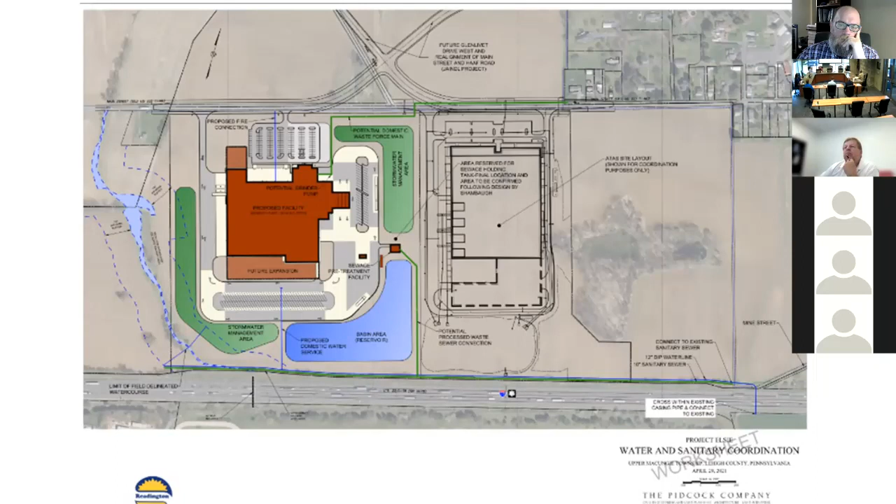These are the tabulation of requirements: average daily consumption of 350,000 gallons per day, peak day flow for one week per year around Thanksgiving time of 500,000 gallons per day. Their average production demand during an 8-hour production day is estimated at 335 gallons per minute, and that's the figure we used to size the proposed conveyance alternative we'll talk about in the slides. There's the sewer requirements on the bottom as well.

You can see a lot of the water goes into the product. We put the sewer details here just so you know we're working on both sides, but the sewer side is really an Upper Macungie Township issue. As we'll talk about later regarding the Act 537 plan, this project is incorporated into what Upper Macungie already has in mind for sewer. This will go to the pretreatment plant.

I left out that they do require 55 PSI minimum residual pressure. The long-term plan has these quantities in the projection for the upper limit. The BOD number assumes a certain level for their facility. This is early on, so that's why I was curious if we're going to get to that.

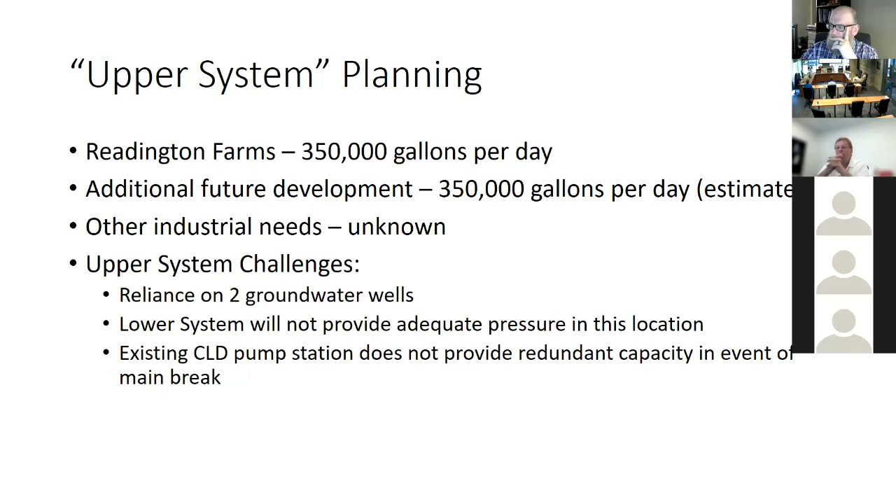This is from our engineer, who we've had on board for a few years, going through water modeling and developing scenarios to get additional supply out to the west end. At the site, you see the 41 PSI circle, that's the pressure we can deliver right now to the site. So that is inadequate for the dairy's needs.

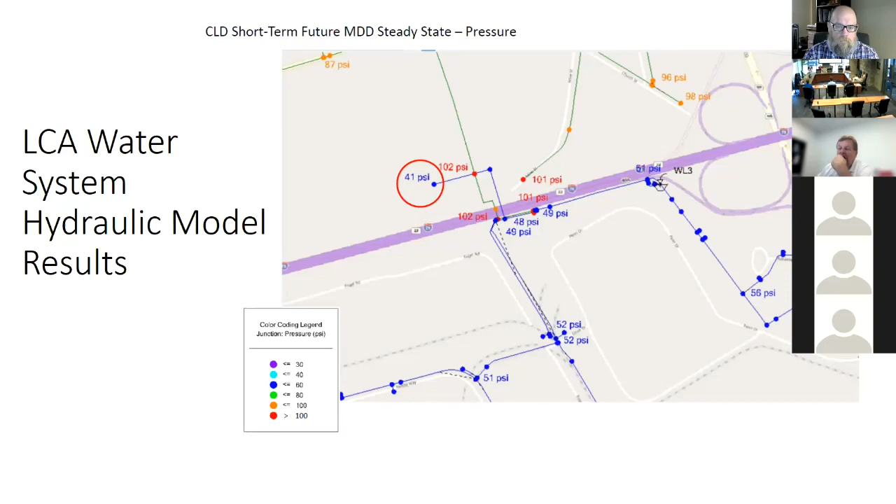What our engineer came up with as a recommended alternative to convey additional supply and pressure to the dairy is to construct a new booster station, just on the north side of 78, across from Boston Beer, and tie into our upper system.

And we developed a draft. We're working with our solicitor in developing a draft cost contribution agreement with the developer. Based on their anticipated needs, they would share 1/3 of the cost of the pump station, and they would share the entire cost of getting water underneath 78 through an existing steel sewer casing pipe that we acquired from Upper Macungie Township. So we're in the process of acquiring that. They've agreed, they've approved it. We just need to get our highway occupancy permit from PennDOT

Before we ink that deal, but the future growth—Ed has done his financial calculations—and the future growth does pay for this station in a relatively short amount of time.

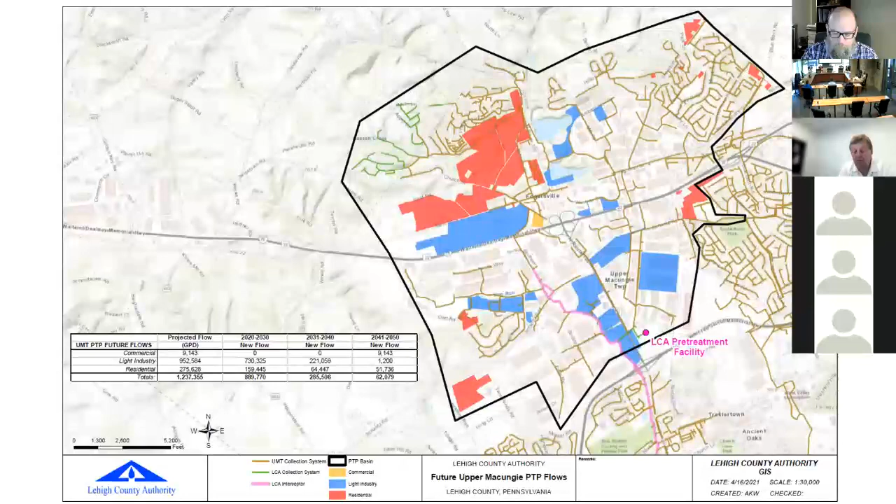Just go back to the system-wide map. So we have a pump station that's in this area, is that correct? On Warwick Road, I think. Yes. And that pump station puts water from the lower system up into the upper system, but it's primarily fed off a single main arterial transmission line. That's the line we'd be concerned about having a break. We had a break on that line, and this pump station would be basically out of service and not able to supply the upper system.

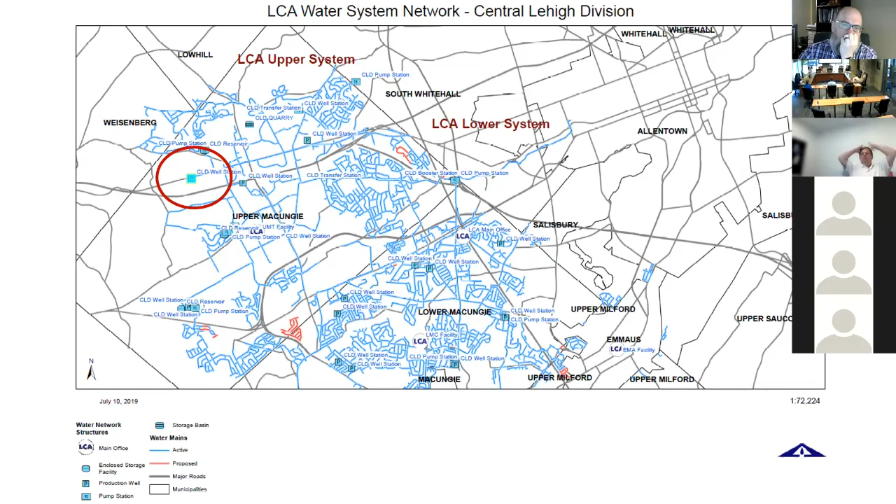So having the new pump station on the other end of the system over here would allow that resiliency and allow the water to be fed into the upper system from a different direction. Is that right? Yeah, and we've been looking for another crossing under the 78, and it's kind of good fortune that the township contacted us and asked if we wanted to acquire a casing pipe they were going to abandon. So it was good timing—get a directional drill under there. Oh my god, that $1 million project. What's the casing pipe used for now?

They put it in and never used it. Well, no, they did use it for sewer. They had a sewer pipe running through the casing.

So we CCTV'd it to inspect it, and we had our engineer do an assessment of the condition. For what we could determine, it's in good condition. We got preliminary approval from PennDOT, though we haven't submitted the highway occupancy permit yet. They're agreeing to the concept of how we would run an HDPE line and then grout the annular spacing around the line, thereby adding structural integrity.

The existing well we have right there, that well is in production. That's well 6, next to this facility. Right now, I think we're flowing that at about 450 gallons per minute, but it's permitted for 700. But there's no way that well can be used to provide water. Well, it would be, it's part of the upper system. So does that feed up into the storage tank? Yes.

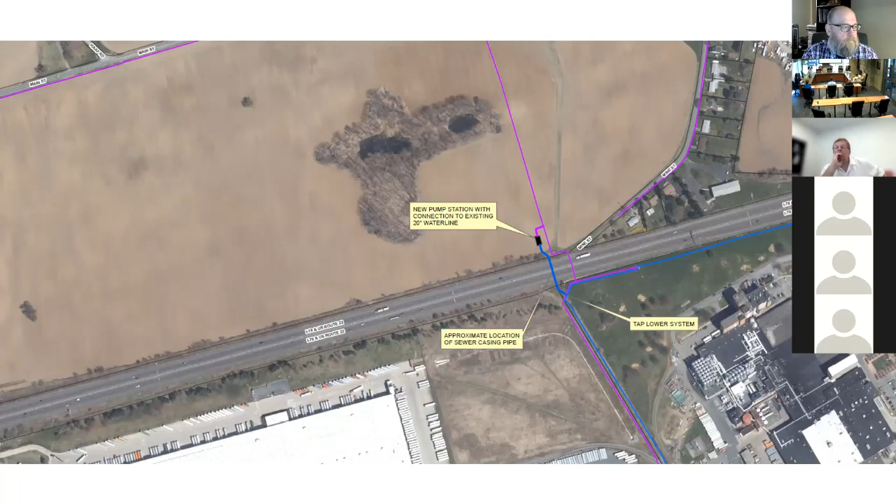And there's been talk about a new truck access route. Talk about any road improvements in that area that affect this project. It's so close to Route 78. I have not looked into that. The Adams Road interchange project, I think, is many years away. So it's kind of separate.

I can tell you, I did some research on the Adams Road interchange. The township had a big study going on. Jaindl was part of paying for it, then Jaindl sort of backed out of it. PennDOT's recent letter on this that I have said they would not allow an Adams Road interchange until major improvements are made at 22 and I-78, Route 100.

That whole section of road has to be widened. I-78 has to be widened before they will allow Adams Road. And it doesn't look like Adams Road is going to happen anytime soon. The way they're going to get around it is interesting.

Right now the township does not allow truck access, big truck access from the village of Fogelsville. But now you're saying they're going to bring the road down to Lehigh Hills to get access to this. But you wonder, with GPS, because they can't take the trucks and go to the village, wherever. So I don't think Adams Road is going to happen anytime soon.

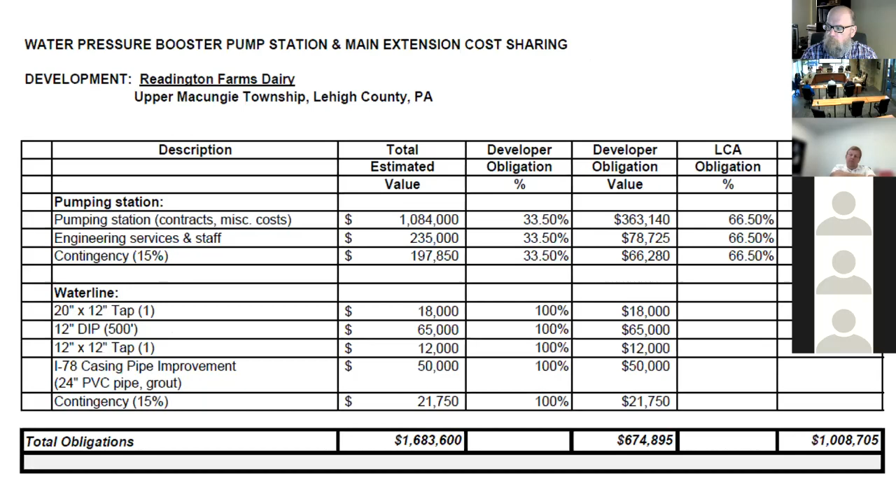So we have one more slide, which is an important one to us, and that's Ed's figuring on the financials. So I wanted to take a look at whether there was an adequate return on this. As Chuck had mentioned, you're doing a little bit of oversizing for redundancy and for latching on to potential customers. But I wanted to make sure that what we had to spend and what we're going to get back after spending all that at least came out to a positive net present value number.

You can see that once you get the money contributed from the developer, Readington, we're going to spend almost, well, a little bit more than $1 million, $1.6 million plus. We're going to get $675,000 of contribution from Readington. So going back to Chuck's cost, we're going to spend almost $1.7 million on this project. After that, we're going to have what I would call normal expenditures on the system, which I kind of patterned after the Central Lehigh Division station.

We're going to get $286,000 plus of annual water revenue. I took a very low discount rate, 1.561, which was kind of what the current market yield is today. And in the last couple of days, it's actually been down a little bit.

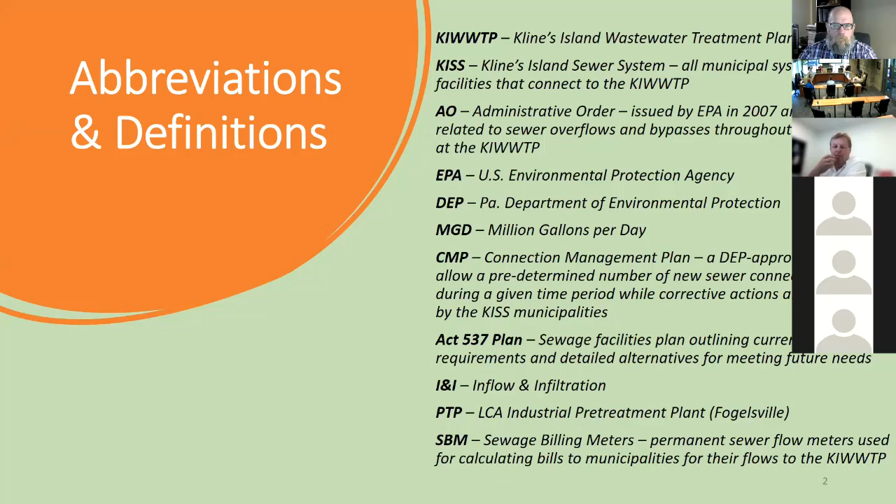And I don't want to go too far into the background. This may look familiar, this was presented in, I believe, May and February of last year about the background. So again, in 2018 and 2019, the region received heavy rain, which subsequently caused the Kline's Island plant to exceed its hydraulic capacity for 3 months in a row. So that is why we are talking about this topic right now.

Again, just to remind you, in March of 2019 the EPA lifted the AO, the administrative order, and transferred oversight back to the DEP. And of course, as soon as that happened, the rain started. DEP got back involved. The heavy rain stopped in the middle of 2019, and that's when DEP came in to talk to us. We've been working with DEP since about August of 2019, continuously.

Just to remind you, DEP did grant the region the 2020 connection management plan for new modules, which I think is on the next slide. We'll wait for the next slide. Here's the cover of the current plan that was submitted. It was originally submitted to DEP in September of 2020.

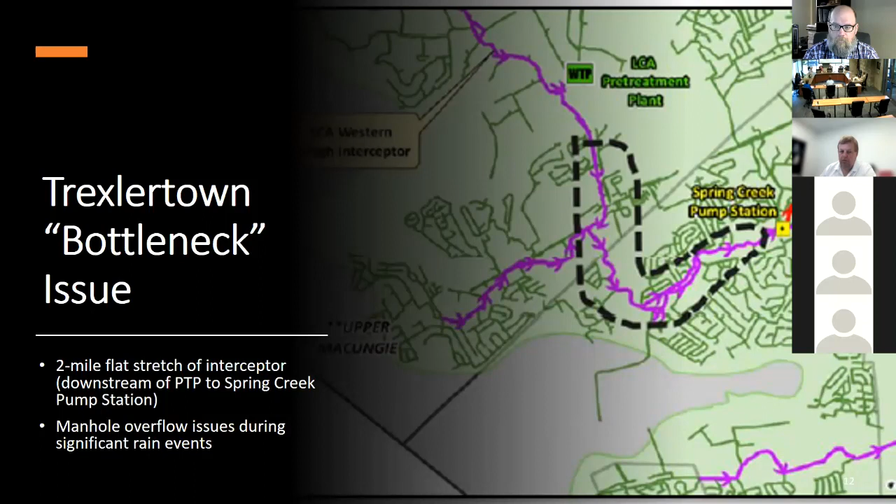And when it rains, there are problems. This has been known about for a long time. I'll get into some potential ideas how to solve this.

So option one, an HDR was hired, I believe early last year, to look at the specifics about how to handle this issue. One of the options: could we just install a parallel interceptor, whether that be right next to the existing pipe or in Town Road itself? And the answer is, you can do that. It will solve the issue in town up to a certain point, but unfortunately you're just going to push the problem downstream.

So if you don't extend the interceptor all the way to Spring Creek pump station, it's just going to come out. The answer is, you can't just stop where Town Road and Spring Creek Road intersect. If you stop there, everything's just going to come out of that manhole because you're just pushing it downstream. So if you want to solve that problem, you have to extend it all the way to the pump station.

At double the cost. But if you push it to the pump station, then you have to increase the pump station, and then it's going to push it down to the parkway. So this is at the top of the system, and it's out of sequence. This should be the last thing that's done, not the first.

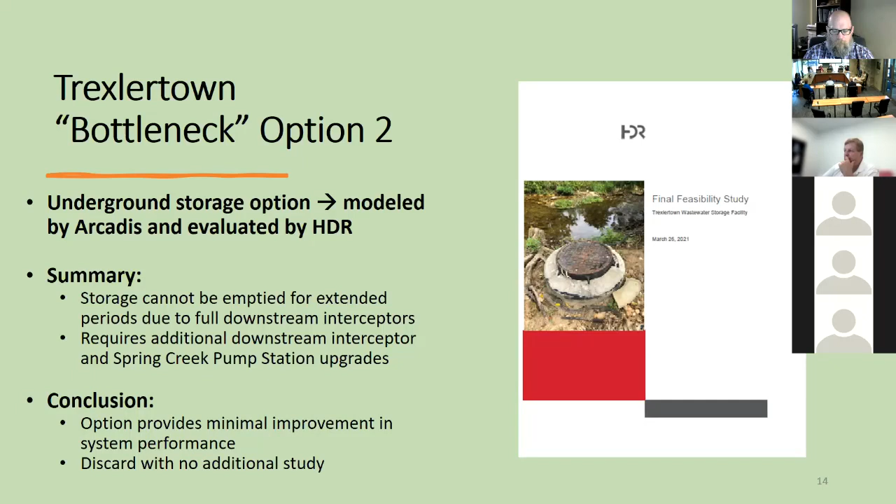So the third option, quickly, just to refresh your memory. Like I said, 10 years ago this was thought about extensively, which means it was thought about 10 years before that. The idea was to take the flow from the pre-treatment plant, build a new force main, tie into the Spring Creek force main, which gets into the parkway. So this was fully designed, fully permitted, and it was not built for a variety of reasons.

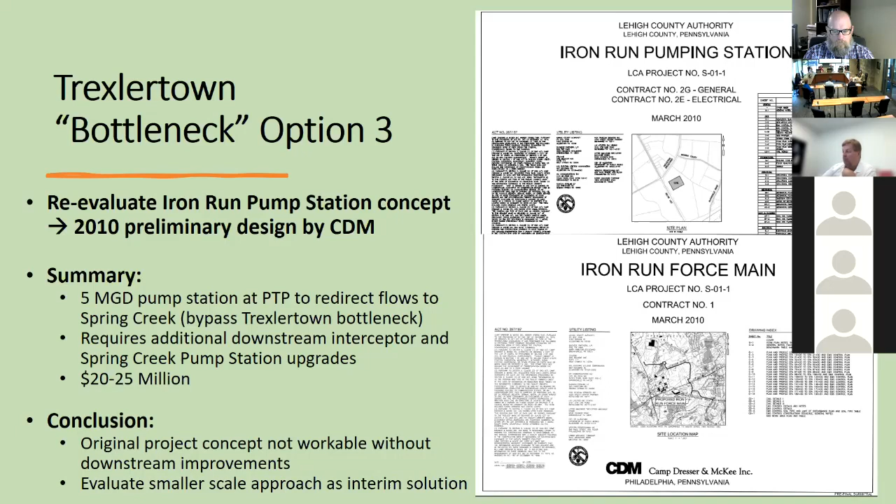This was the identified solution back 20 years ago, and again, this can't be done because of that downstream impact. So it was thought about extensively, but this will be the next slide, which typically could be our saving grace.

So what we've come up with, in collaboration - Scott, to your point, the collaboration here has been great regarding the whole region - there is an Upper Macungie interceptor that takes some of their development to the north and east of the pretreatment plant. It basically follows Mill Creek Road. It's been installed, I can't remember when, maybe 10, 15, 20 years ago, and they have excess capacity in that interceptor.

And Upper Macungie, they're on board with this idea. So the proposed solution, again, it's not permanent, it's interim. We would build a small pump station at the plant, and install a force main into the Upper Macungie interceptor, which we already have easements for because we got that during the Iron Run project from the last slide. There's a small easement in Upper Macungie Park that they would provide to us. That would relieve us, short term, in the Trexlertown area while we determine our long-term solution.

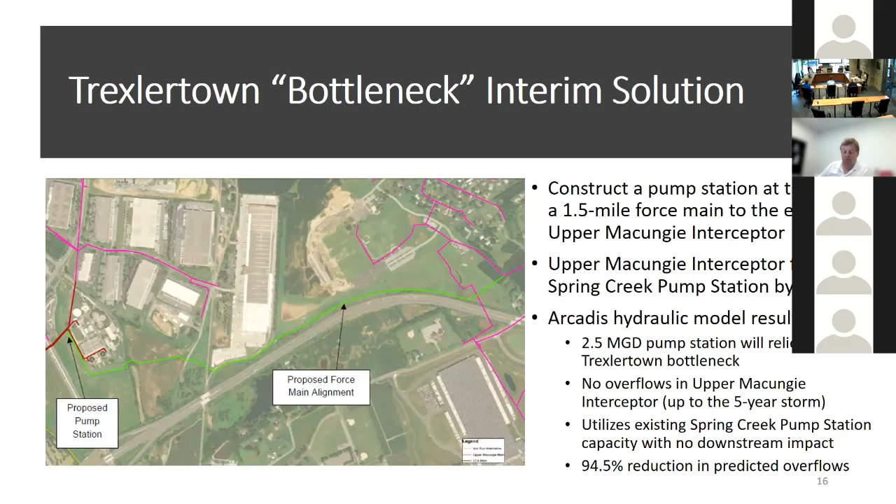So again, it's not a perfect solution, but this is our get-out-of-jail card for the next 10 years while we figure out what we're doing long term. We already have the easements, except for that small portion in Grange Park. The details of the pump station will be determined - how fancy it needs to be. We're estimating $3 to $5 million, and it can be built by 2024.

And again, I mentioned that DEP wanted something in the interim plan about this. We talked about this briefly, but they want to discuss it in more detail. They are aware of this solution.

One of those options was another interceptor running to the Spring Creek pump, right? Yes. Okay, so that would, to me, sound like that would equate to the same thing as a line coming down from Upper Macungie, regarding the volume hitting the pump station. Yeah, the same volume is still hitting the pump station. I see what you're saying, but the volume indicates that going down the Upper Macungie route will not mean an increase at the Spring Creek pump station.

But if we build an interceptor, a parallel interceptor, it would require a Spring Creek pump station to be upgraded. Correct, that's what I don't understand either - it's the same flow coming through. Yeah, we can get into all those details too.

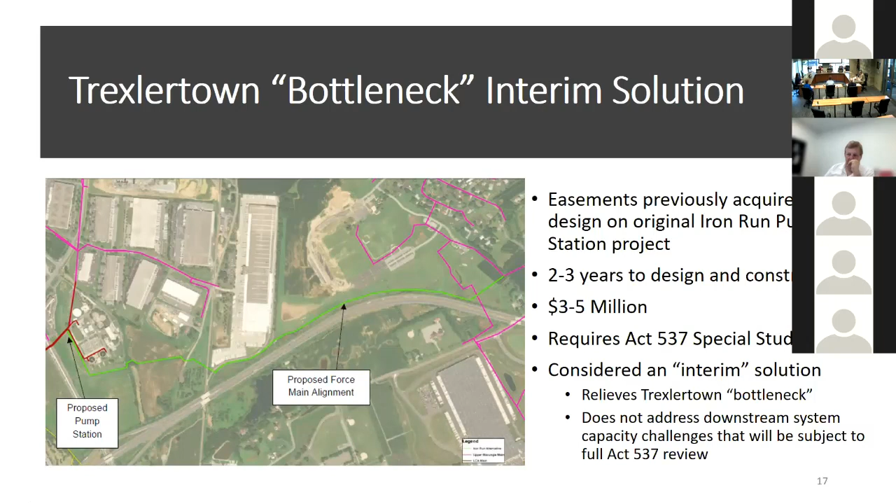Okay, so just to wrap up, there's two options that we talked about: convert PTP to full treatment, or start at the bottom system like Scott talked about and work our way up to this area. So those are the two main options that the long-term solution will look at. Again, 2025 is the target date to have this nailed down.

When you said parallel interceptor, are you talking about possibly running a whole new interceptor from Flagler all the way up? Not exactly, but some of the areas will need to be parallel. That's what I always felt - that's looking at the really long term. Yeah, some areas will need it parallel, some won't. And then we get into the whole regional core pump station discussion - that's going to be needed.

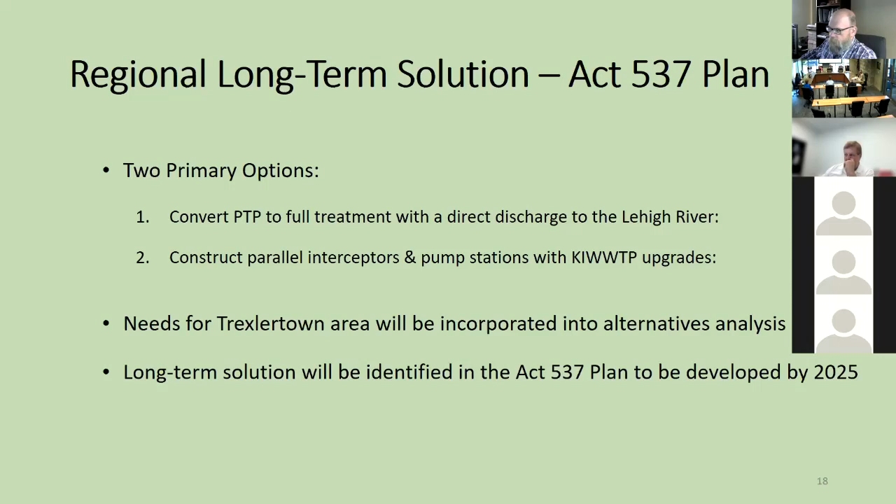Okay, thank you. So again, the next step for 2021 is to talk to DEP immediately about this topic. All right, thank you, that's very helpful - actually, that sounds more promising.